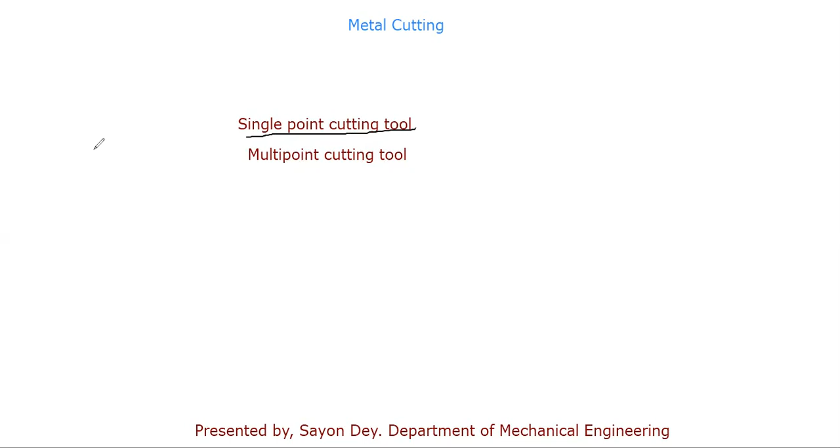I have already told that in our machine shop we mainly do the material removing process, that means machining, and this machining operation can be done through cutting tools, which can be divided into two types: single point cutting tool and multi point cutting tool. In multi-point cutting tools, they have more than one cutting edge to remove the excess metals from the workpiece.

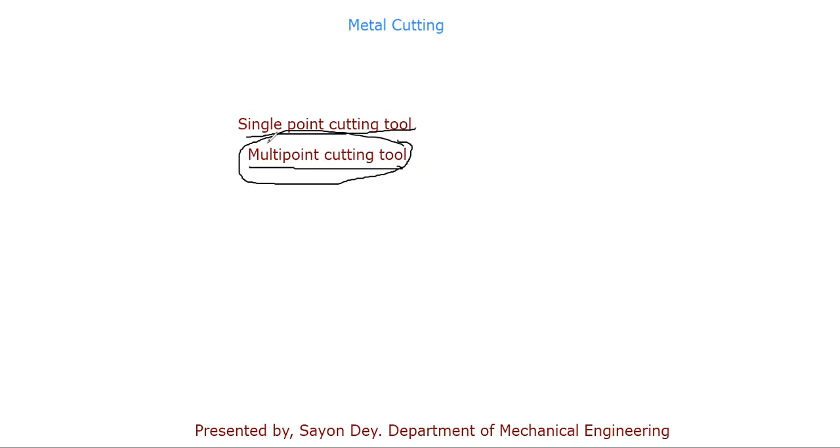So in case of the multi-point cutting tool, there will be more than one cutting edge to remove the excess material. But in case of the single point cutting tool, basically there is one cutting edge. The cutting tool has a single point cutting edge, and the tool is made of either high carbon steel or it may be carbide also.

In case of multi point cutting tools, we can give some examples like milling, drilling, grinding, broaching. The common example we have also seen in our workshop is drilling. In drilling, the cutting tool is the drill bit. That is a perfect example of a multi-point cutting tool.

But in case of the single point cutting tool, some examples are turning, shaping, planing. Also in our lathe we use a cutting tool to cut or remove the metals, and this is a single point cutting tool. So today we are going to discuss mainly the single point cutting tool.

One information I want to give is that in case of single point cutting tools we generally use HSS, and the full form of HSS is high speed steel. That means high speed cutting will be there. Another information is that the tool will be 30% harder than the workpiece. In any case of metal cutting, the tool must be harder than the workpiece, then only we can cut our workpiece.

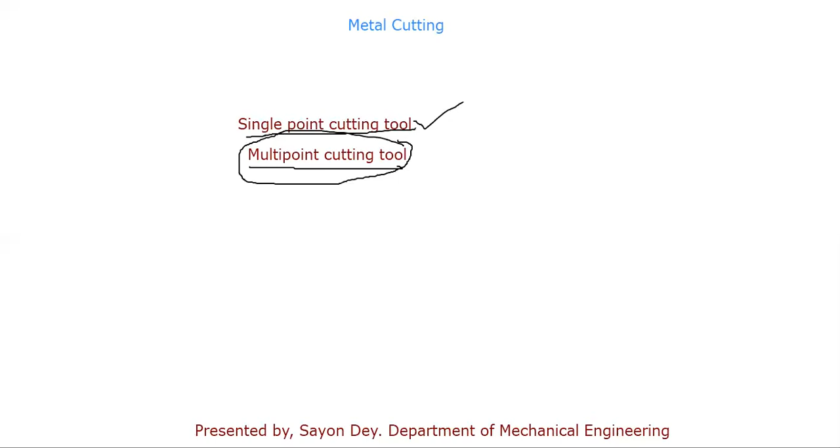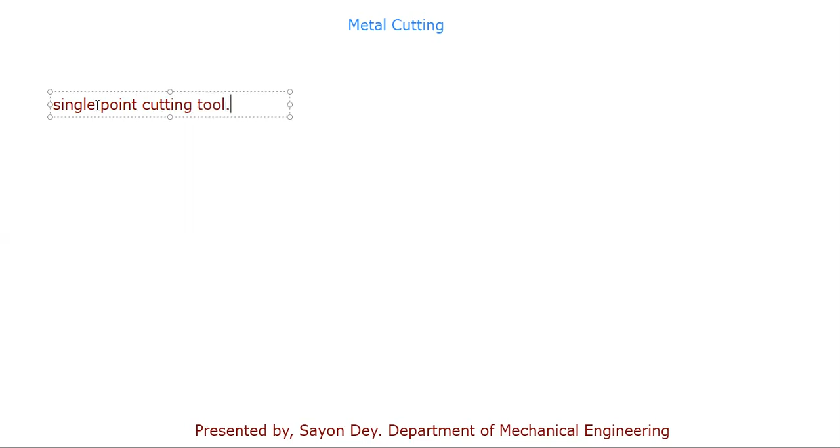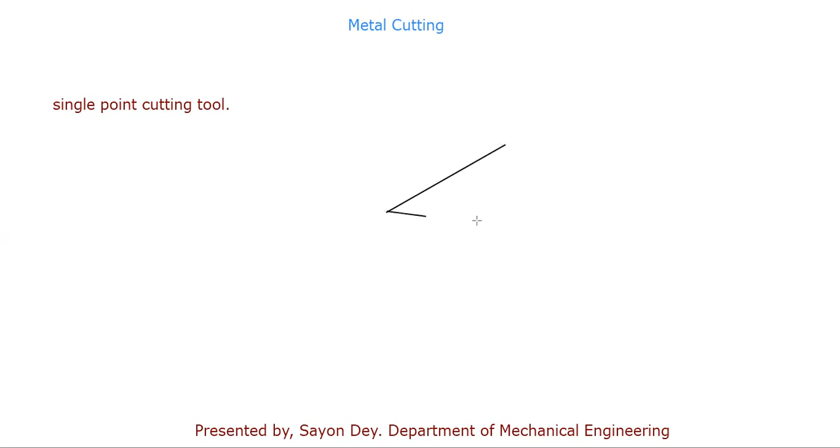So now we are talking about the single point cutting tool. One example I have given is that in our lathe we use this single point cutting tool. So I'm going to draw a picture of the single point cutting tool. That means I want to show you the basic tool geometry. Please draw with me so you can understand.

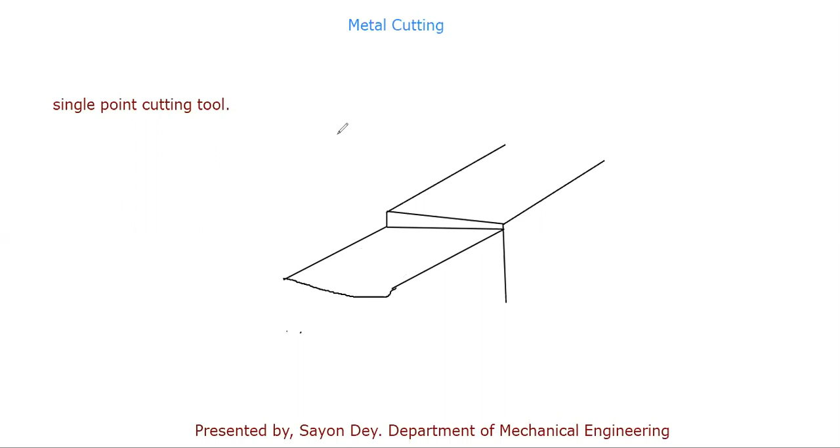Sorry. So I'm drawing a picture of a single point cutting tool. This is the procedure to draw it. It is difficult to draw here, but still I'm trying. So this is our picture of a single point cutting tool. In the lathe also we can see this type of cutting tool, held in our tool post.

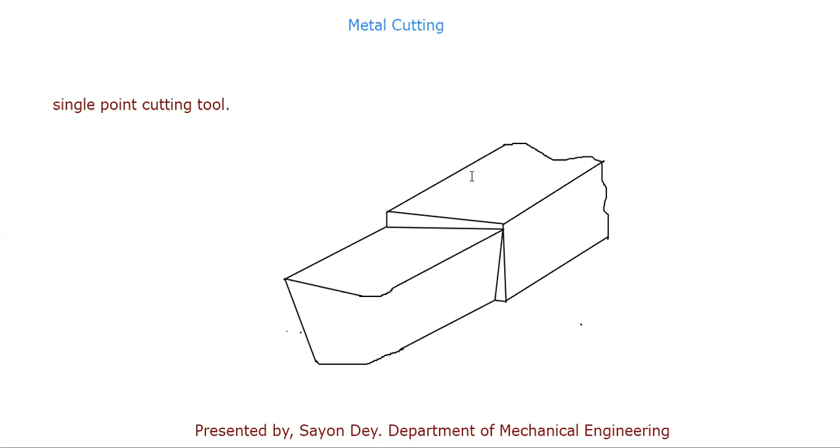So there are various parts here. I'm going to show you. This portion is called the shank. And there are other parts I'm going to show you. This part is called the side rake angle.

This is the side rake angle. Another thing is this part, which is called the side relief angle. Here we can see this type of curve. This portion is called the nose, and the radius is called the nose radius.

As I already told, in our single point cutting tool there will be one cutting edge. So this is our main cutting edge. There are other parts also, like this portion, which is called the rake face. That means I am talking about this part. This part is called the rake face.

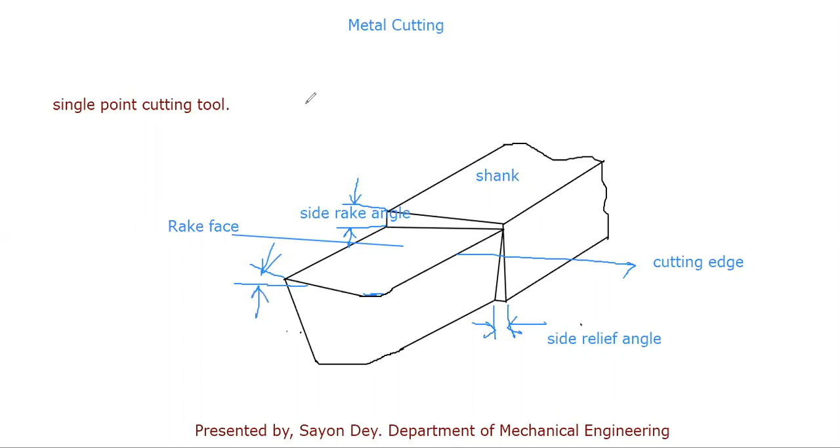Again, this is called the end cutting edge angle. And this portion is called the end flank.

Another part is that this portion is basically called the clearance, or it is also called the end relief angle. And as I have already told, this is our cutting edge.

And this portion, sorry, this angle is called the side cutting edge angle.